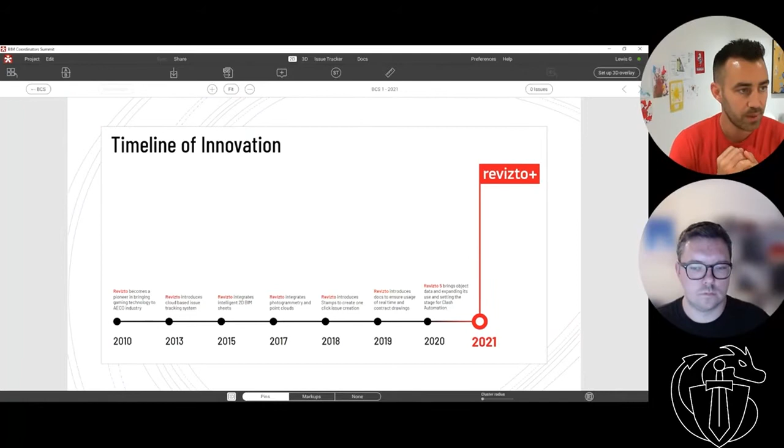So starting with bringing that gaming technology through, we moved on to a cloud-based tracking system, integrating 2D and 3D information into one single environment. Interoperability is something we're all passionate about here. It really is down to our clients what they want to use in terms of authoring tools. Revizto supports a wide array of file formats. The last 2 years, we've really been laying down the foundation to bring Revizto Plus and our Clash automation tool to the market, which is what you'll see today. If we just flick across to the next one.

And the big challenge we hear from our clients is the multiple platforms that they need to train their users on. Taking some points from the last session, we see 3D viewing platforms, 2D review platforms, a communication platform, a tracking platform, a clash detection platform that are required by project teams to do their coordination successfully. Revizto is an integrated collaboration platform that will allow you to do everything I've just mentioned in a single tool that's lightweight and user-friendly, so we can engage with the entire project team. So as an integrated collaboration platform, we can do everything I've just mentioned in one place.

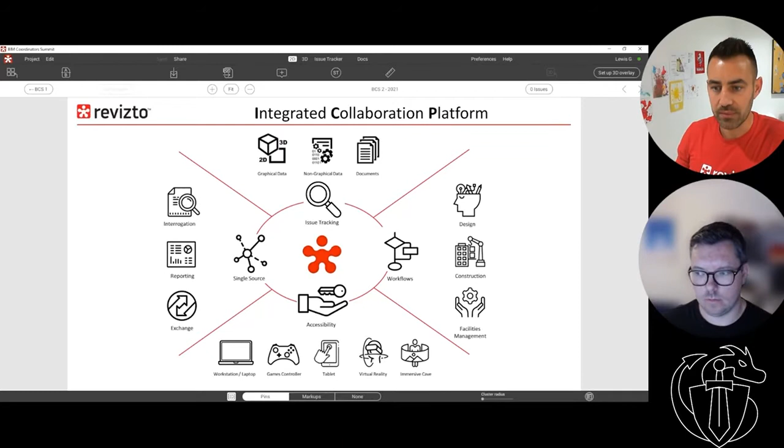So without any further ado, we don't have too much time, Lewis, so if you just flick the next slide, we can show our audience Revizto Plus. So over to you, Lewis.

Yeah, perfect. What we're about to show you has been 9 months in the making, lots of development time with our technical team and our industry partners as well, helping to shape this in a way that's really going to change the way in which coordination is carried out on projects. And again, it was mentioned in the previous session regarding training, and not every company is lucky enough to have these skilled experts working on all their projects all the time.

And what we're trying to do at Revizto is trying to make the tools as easy as possible to use. Again, using as many different of the authoring tools as possible, so there's not just one way of doing this. But making the tool just so easy to use that anybody can do this, whether or not you are a professional BIM coordinator, or you might be a design manager, or you might just be an engineer working on a project.

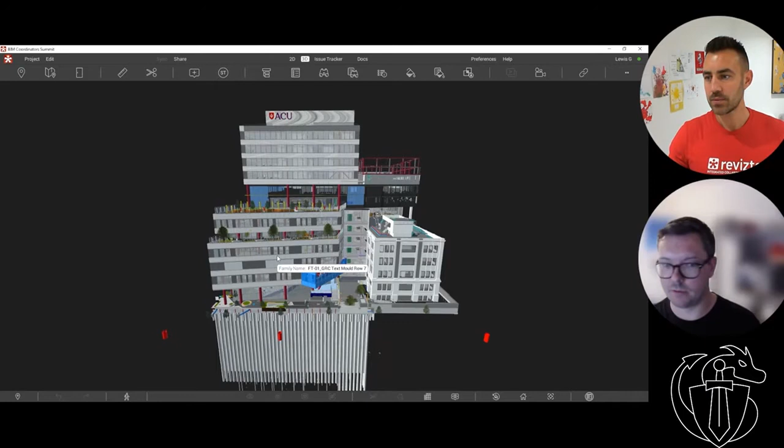Revizto Plus and the Clash Automation is all about making everyone kind of an expert if they need to be able to assist with the coordination process and saving time. So we're going to jump straight in. We're going to focus on the Clash Automation tool. Our Clash Automation tool has been built entirely around the generation of search sets so that you can be as specific or as generic as you want with the data that you're clashing.

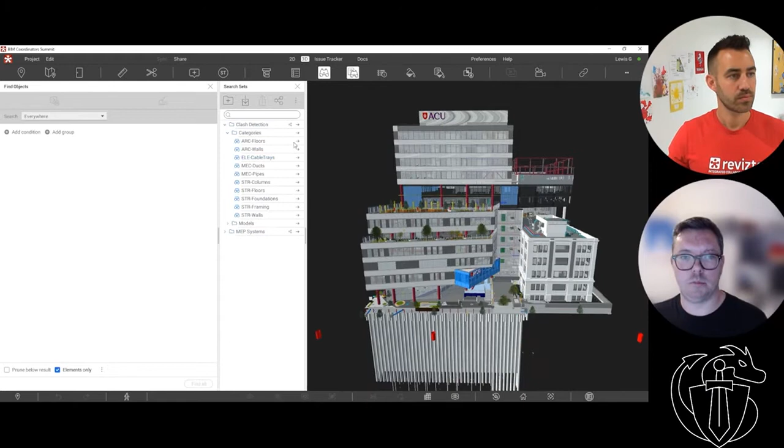So I've got some search sets set up on here for models. So we've got architectural floors, architectural walls, cable trays, ducts, whatever it is, but we've also got the whole model level. So I can clash all the architectural models with other things as well. So we'll jump into our Clash Automation tool.

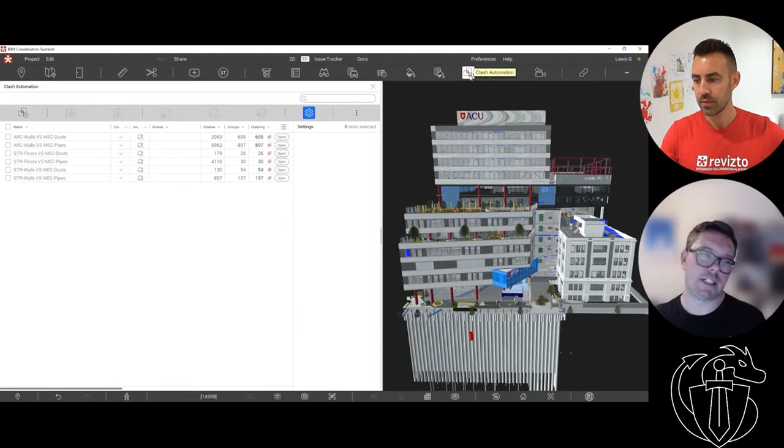And Revizto, as Rhys mentioned, is a collaboration tool, which means that multiple people can work in the space at the same time. And that's now true for our Clash Automation tool as well. So you can actually have many different people running their own clash detection all within one platform. They can be sharing those results with different people. They can be using the switchback functionality that Revizto has back to the authoring tools as well.

So immediately I can see that Rhys is now actually in there reviewing the structural floors versus mechanical pipes clash test. So it's just opened this up to have more people doing the job at the same time, but because it's so easy to do, it doesn't take any time for them to learn this or to really get to grips with carrying out Clash Automation.

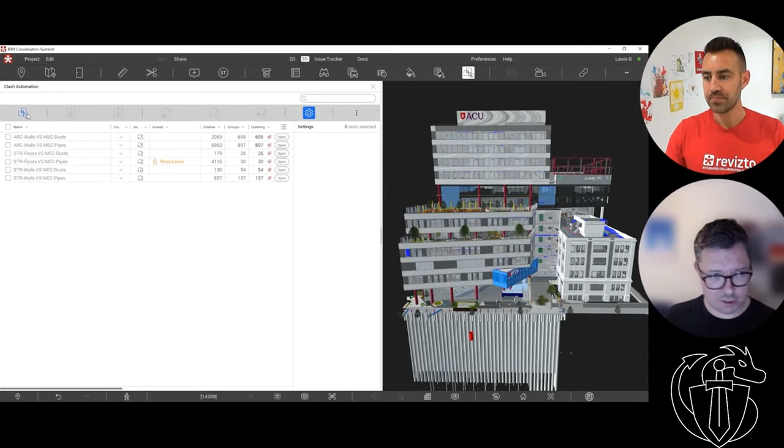So we're going to jump straight in. We're going to create some new clash tests. We mentioned it's all search set based, so I'm going to do my structural model versus my MEP model, a fairly standard clash test. I could use my categories and I could be really specific with the kind of clash test that I'm creating. But with the tools that we've generated, we can be very generic in our clash tests and really specific with the way in which we group the results and share it with the wider team.

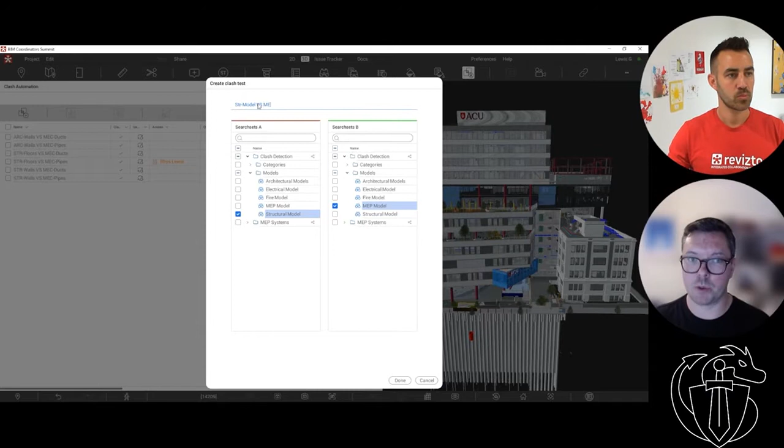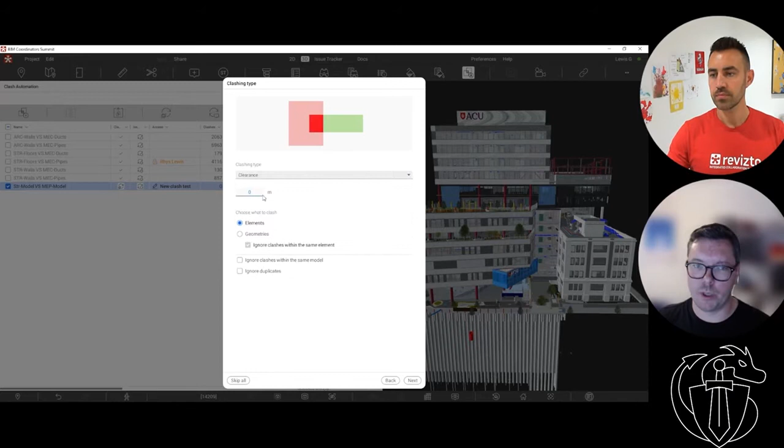So I'm just going to create this one here and I'm going to say done. I can import settings from previous clash tests. Again, because it is collaborative, you can share and pull information in from previous ones, but I'm going to carry on without. Now I'm going to specify my type of clash. So we've got a standard hard clash. We've got a clearance, so we can automatically add zones around objects to ensure that there's maintenance room or just allowing for space between them.

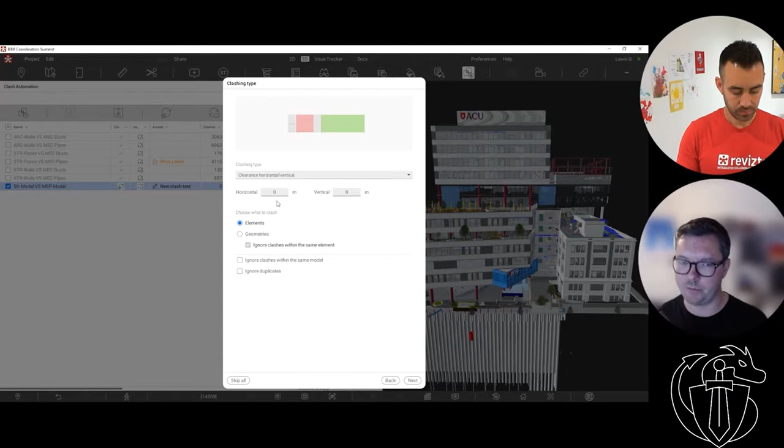And with the clearance option, we also realized that it's really important to have a separate horizontal and vertical offset, because sometimes you only care about the vertical offset, not the horizontal one. And by having a single clearance space, it was messing up your results and you would get some false positives that were only there because of the tolerance or the clearance that you'd specified. So this has been really useful to a lot of our customers, to be able to specify this separately for the distance. And again, we have the same with tolerances, horizontal and vertical.

I'm going to use just a hard clash for this one. We can choose elements or geometries depending on what kind of authoring tool you're using, but I'm going to skip through this one. The key thing with Revizto Clash is really about how we group our results. So with Revizto Automation, we're grouping everything as we run the clash test. We're not having to run the clash test, get our results and then manually group them or use grouping tools to do this. It's going to be immediate with the running of the clash test. And in here, we've got 10 different types of grouping that we can do.

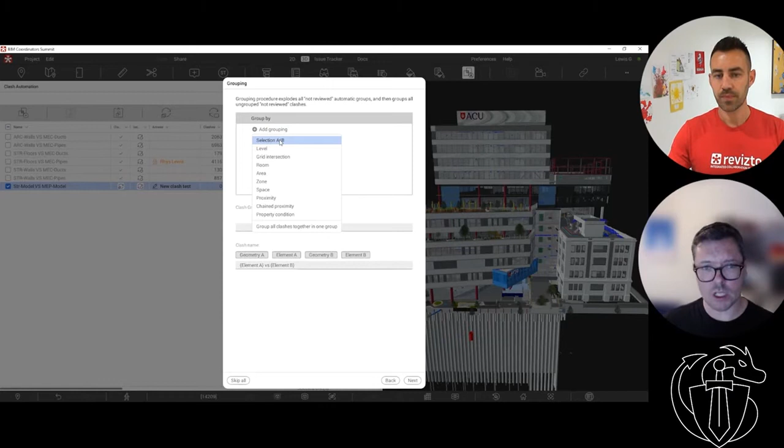So we've got selection AB, which basically means that you can choose the left object or the right object to group your results by. You can group by level, you can group by grid intersection. Grid intersection has proved massively popular with our infrastructure projects where they're using chainage lines as grid references and they're able to group their results immediately through that method.

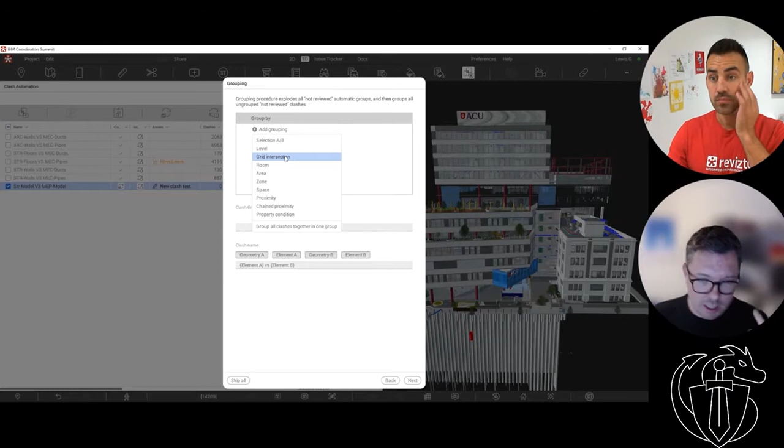For projects where we have room data, we can group immediately by what room the clash is in. So you can see straight away the problem areas in the project and things like that. That's also true for areas and spaces, which are more Revit-specific terminologies, but everything else here works with all the other platforms.

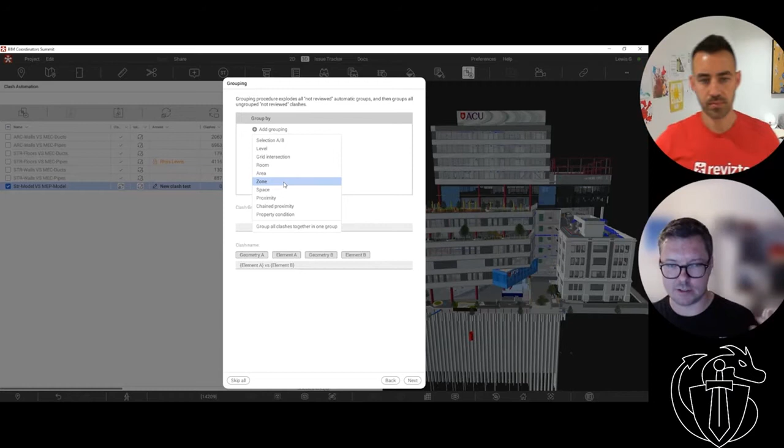We have zones, and zones are like custom created spaces within Revizto. So the way in which this will work is in your authoring tool, you will create an extrusion or many extrusions that you want to zone the project out by. So for example, you might have 4 or 5 buildings in the same Revizto project. You could easily create an extrusion around each building, call it building 1, building 2, building 3, etc.

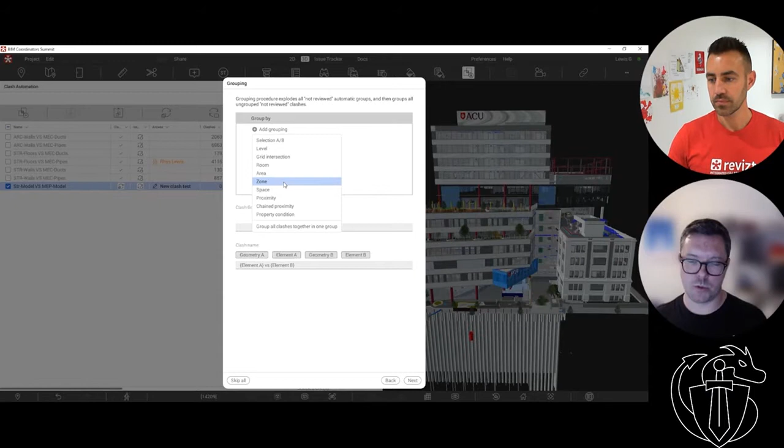Export that into Revizto, convert it into a zone, and then you can group by what building it's in or whatever it is that your zones are going to be used by. So again, it's just really helpful for people. You might not have rooms available, but you can create zones that help you break the spaces down as and when they're needed.

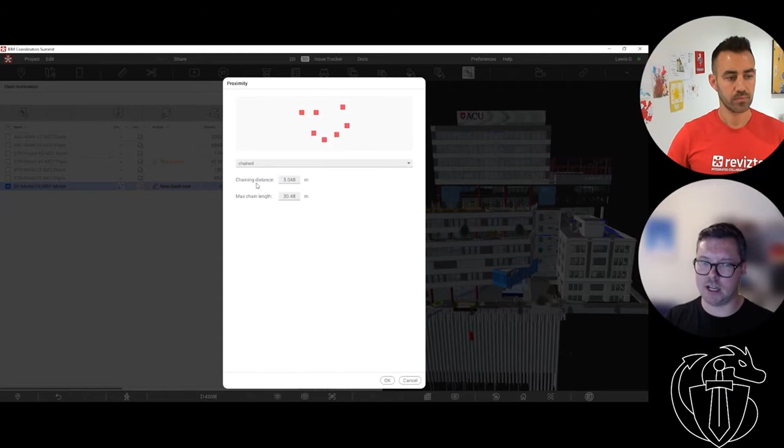We've got proximity and chain proximity. So proximity allows you to draw spheres around the clash, and then it will group everything together by there, so you can create nice, neat little chunks. And chain proximity does the same, but it starts joining the spheres together. And you can specify a maximum length of the chain, so it's not going to go on forever. It will be sensible about how it works.

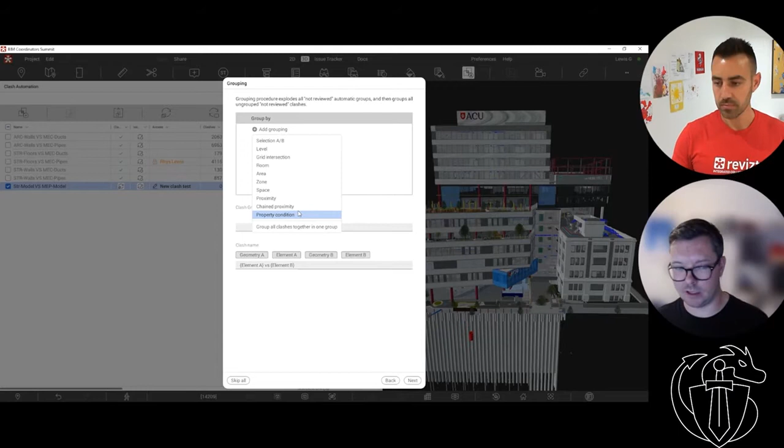And then finally, we've got a property condition, which basically now lets you use any of the data in the model to start grouping your results by. So it doesn't matter what it is that you're looking for, you can find it, you can add it, and you can group by that method. So for this example, I'm going to start off just by grouping by my system abbreviation. So I'm going to come in here and choose system abbreviation, and I'm going to say, OK, that's all I'm going to do for the time being.

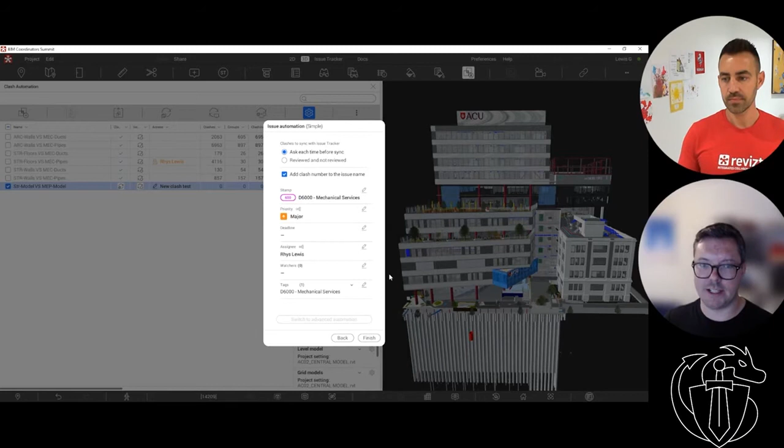We then say next, and then we've got some automation, because as Revizto is an issue tracker, we can automatically push our results into our issue tracker, and we can follow part of our stamp. So I can specify that it's going to go to the mechanical services stamp. It's going to set the priority as major. We can automatically set a deadline here to be plus 14 days. It's going to assign it to Rhys automatically. And just so that I can find it easier, I'm going to add an additional tag to these results as well. And we can say finish.

For now, this is the automation that we've got. In the next few months, we will be adding our advanced automation here, which will allow you to use rules to define where the results go. So the simple automation that we have here applies to all the results. But with the advanced automation, you'll be able to specify rules such as if the pipe diameter is less than 100 mil, we can automatically approve it.

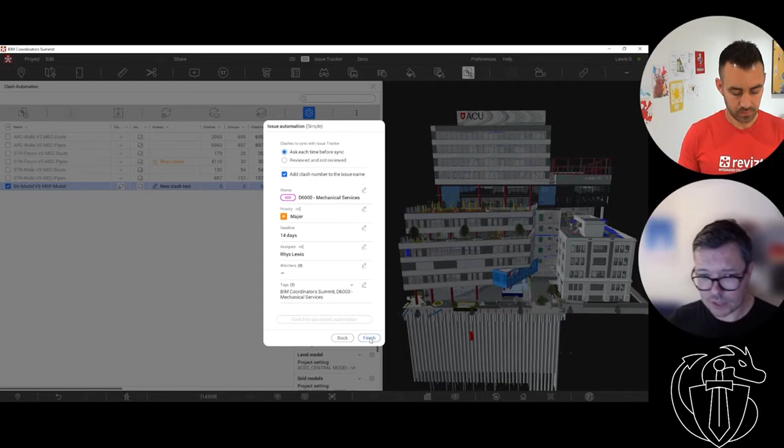If the clashes involve ductwork, we can assign that to the ductwork engineer. If it involves pipes, we can assign it to the piping engineer. You'll be able to specify that within the advanced automation so that you don't have to do it yourself. It will automatically know where to send the results. So we can click finish. Before we run this clash test, there's just a few more settings that we can run through here.

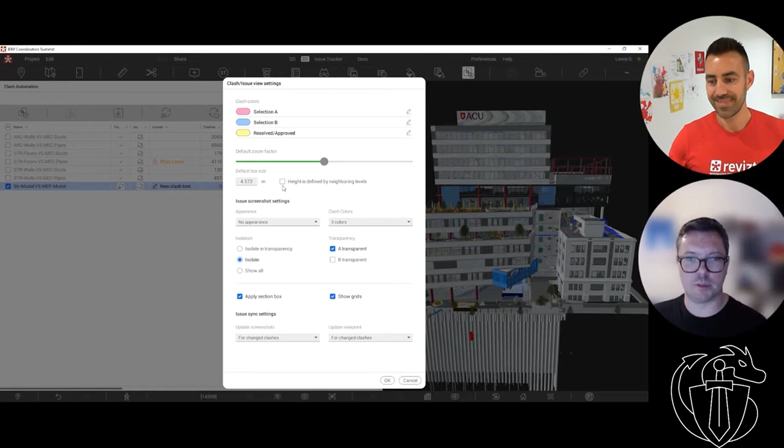So the view and screenshot settings, this allows us to change the colors of the clashes. I think years of being a BIM coordinator means that I'm actually scared of the red and green clashes, so I like to use much softer colors like pink and blue. It makes me feel a lot more comfortable. We can set up how the section box is going to work, how close to the clash we are when we're reviewing it. We can set all that kind of stuff up here.

We've got access rights for clash detection. Because clash detection is now collaborative, everybody inside of Revizto would be able to see this, which is a good thing because you then have that transparency. But what you can do is you can limit who can see it, you can limit who can edit it. So you might have it so that everyone on the project can actually view the results, but only certain people have that permission to make changes to the grouping or to even rerun the clash test as it is. So you can control that within here.

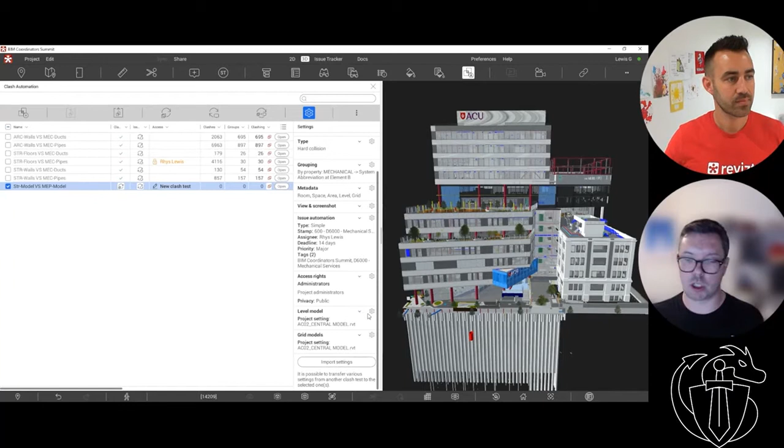And another really useful feature that we have is you can actually specify a different model to the rest of the project to use to determine what level you're grouping your results by, or by what level you're reviewing the results by. So, for example, my project is set up to use the architectural model for the levels everywhere else, but my clash test is now structural versus MEP. So what I could do, I could actually choose to use the structural model here, so I get SSLs on top of steels rather than the finished floor levels as per the architectural model. So it's giving you lots of flexibility on how this works.

I'm going to run the clash test now. It won't take very long. It's pretty quick. We've had one example with one project when we were testing this out where we generated 3 million results in 45 minutes. There was a bit of backlash on Twitter for us talking about that. People weren't really that bothered, but the idea was that we could actually run clash detection on that big of a result set in 45 minutes, and then immediately you can get in and start filtering your results out by what room it's in or by what level it's on.

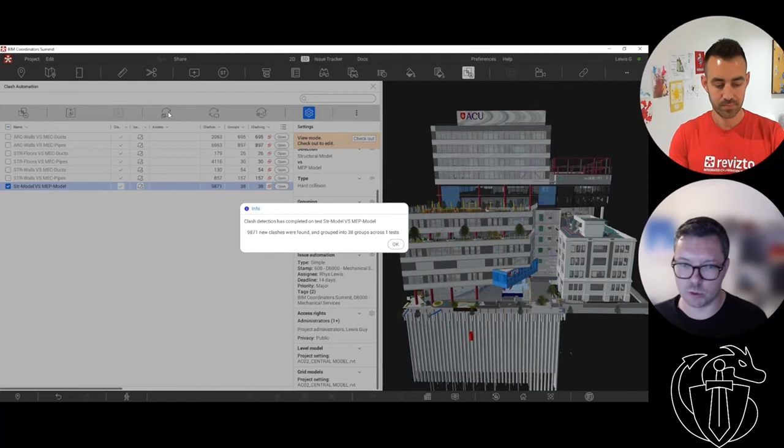So the 3 million results in 45 minutes, first of all, that is pretty quick for any tool that's running clash detection. But the fact is that within 45 minutes, you've got those results, and then you can start doing whatever you want with that information. You can start filtering it, or you can start raising issues immediately. So the job of a coordinator is not just sitting around waiting for these tools to finish running. You've now got immediate access to do it.

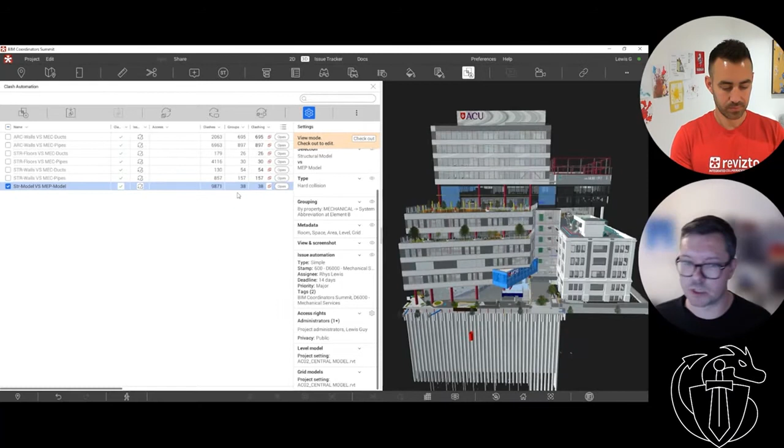So we could see there in a matter of seconds, we've generated 9,871 clashes, and they've automatically been put into 38 groups. So we're showing that raw data because, again, too many people get excited when they see their clash detection. They've only got 38 issues to review, but in those 38 issues, there's actually 10,000 clashes. So there is a bit of work to be done. It's not just 38 results that you've got to fix. So it's good to have that raw data there so that you can see exactly what's going on.

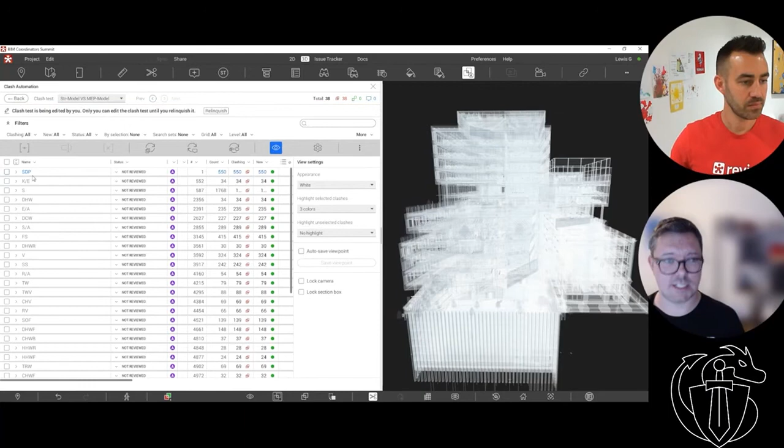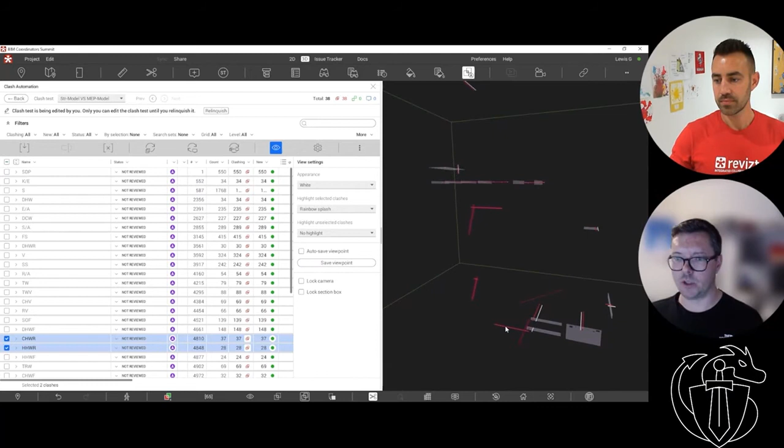We can now open up this clash test, and we can see that the grouping has automatically been done. So we've got all of our different systems. So I can come down here and I can pick my chilled water system. I can isolate that out, and I can immediately now see all my clashes that are to do with chilled water. I can show hot water at the same time, but it's not easy to differentiate between them. So we can switch our color system so that we can highlight. So the red clashes are one system, and the purple color is a different system. So you're really able to have multiple things on the screen at the same time, but review them instantly in a way that makes sense for you.

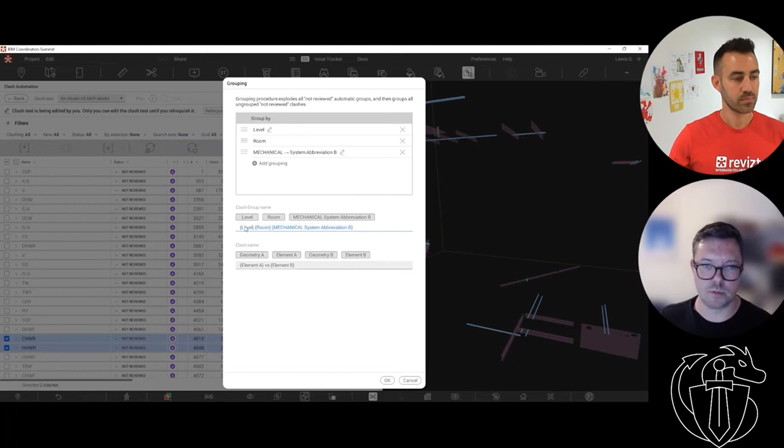I might determine that this grouping that I've done actually isn't very useful. It's a bit too basic at the moment. So I can go back into my grouping tool and I can add some more. So we're going to group by level, and we're going to group by room. So I'm just going to reorganize that. We can change the name of the group. So I can give this a name that makes it read nicely. So we're just going to say that. I'm going to say OK, and then I can just regroup my results.

And again, in a matter of seconds, this has now been regrouped. So you can do this on the fly in coordination meetings. You don't have to go away and do this at a separate time. You can start playing around with this whilst you've got the team in the meeting, so that you get grouping results in a way that makes sense to the rest of the team.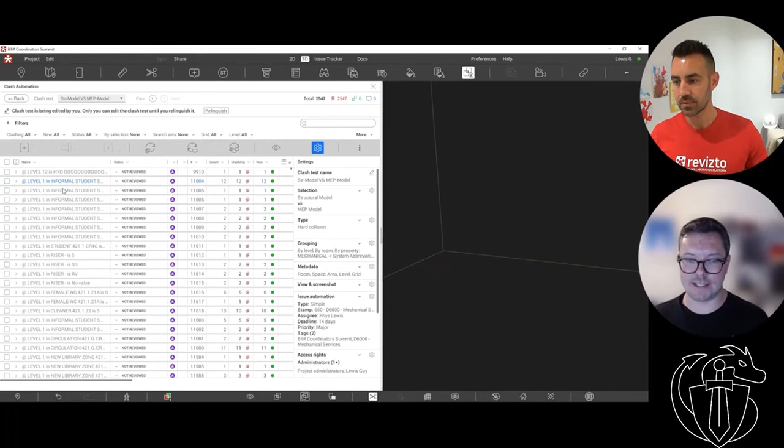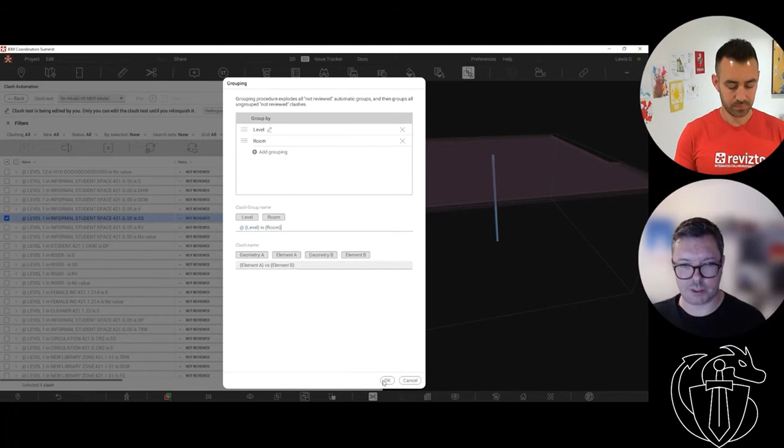So now, if I just expand that out, we can now see all of our level 1 informal student spaces and the systems that are clashing within there. So the grouping tool allows you a huge amount of flexibility to see the results in a way that makes sense. I'm going to change my grouping one more time, get rid of the system classification, and regroup that. So we've now got our groups working in a way that makes sense for us and for the team.

And now you have your coordination meeting, and you're in a room with a particular set of people, and you want to review those results. You've got a big long list here. There's still 1,000 groups to review, so there's still quite a lot of information to work through. So what we've done is brought in filters to our clash tests, so we can start to see just the ones that we're interested in.

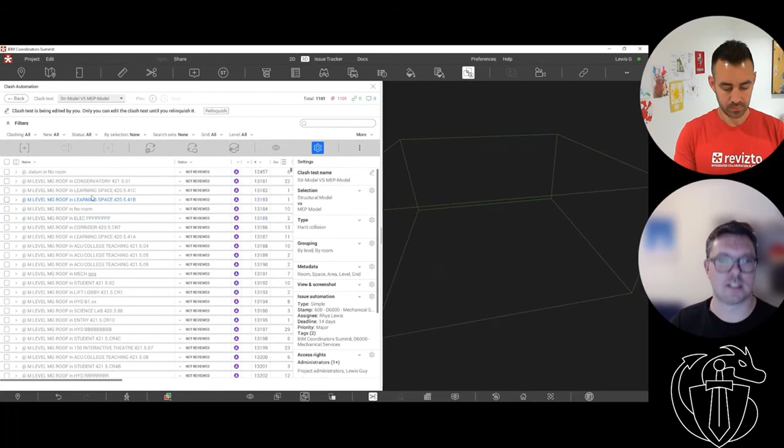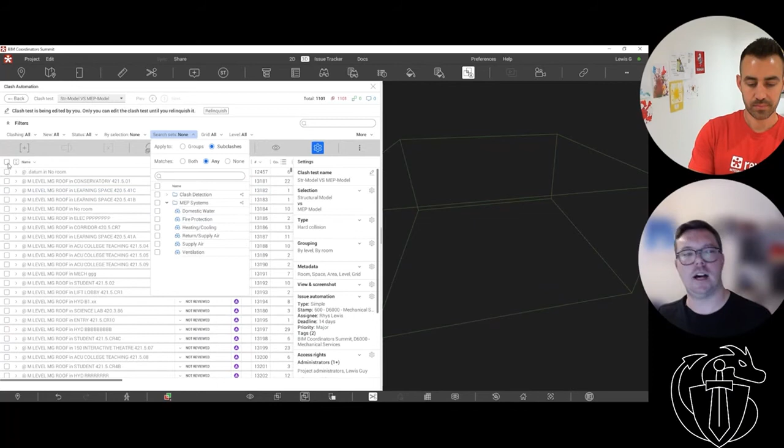So this clash test was created using the structural model search set versus the MEP model search set. But I can now go into my other search sets. I've got some search sets set up here for my MEP systems. Let's say I'm in a meeting with my sprinkler team, and I want to review all the issues to do with fire protection. I can select everything first, so we can see it all on the screen, then filter by my search set and say, just show me fire protection.

And immediately that's now filtered out every result in the clash results to just show me things to do with sprinklers. So every issue here, if I hover over this pipe, we'll see that's a wet fire protection pipe. So we can easily get the results into a way that works for the team having the meeting. And we can take this further.

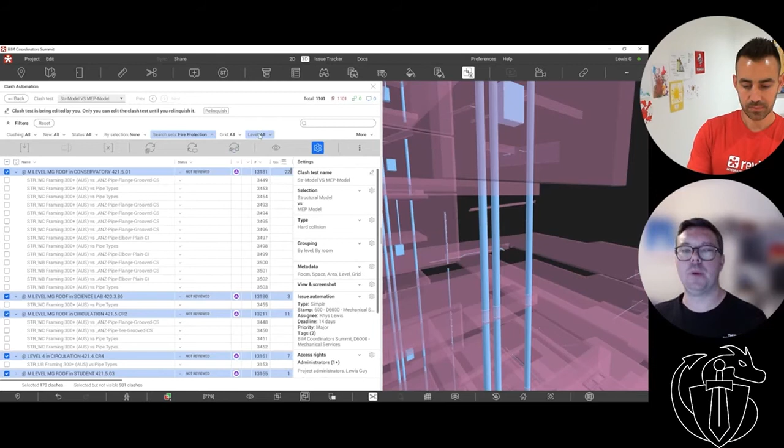So again, I can stick with fire protection, but we might say, OK, today we're reviewing level 6 only. So I can filter down to level 6. And immediately, we're now just viewing all the clashes to do with fire protection that exist at level 6 of the model. So you don't have to go through a huge long list reviewing everything, trying to work out which ones are actually relevant to the team in the meeting. You can do that immediately using these different filter systems.

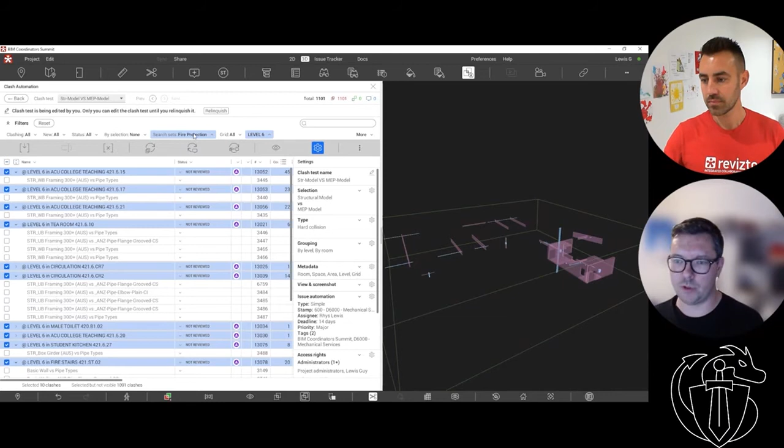At this point, what I can now do is take these clashes. There's not too many of them, so I'm just going to select all of them and mark these as reviewed. And I can now push these to the issue tracker. So we can say these need to go public, and these are going to go into the wider team, into the issue tracker. So we can just sync that.

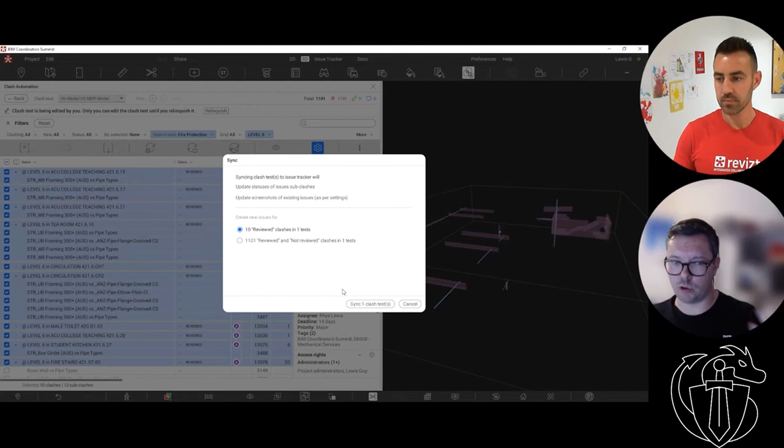It's going to ask me, am I syncing just the 10 that I reviewed, or the 1,100 that have been created? I'll stick with just the 10. So I can sync that, and that's now going to go into my issue tracker. They're going to be made public to everyone on the project, and there's now a deadline to get these issues fixed. In the meantime, I can go back into my results, and we can start playing around with this information again.

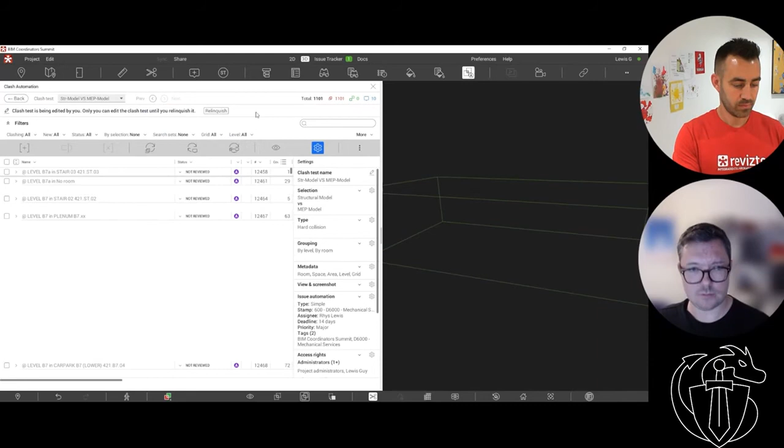So I can go in here and get rid of my level information, get rid of my search set, and go into my object tree now. So I can just say, OK, I want to see all the issues to do with columns. I can type in columns into the model, go by selection, and activate it. And then automatically, on the screen now, we're seeing all the issues to do with columns only.

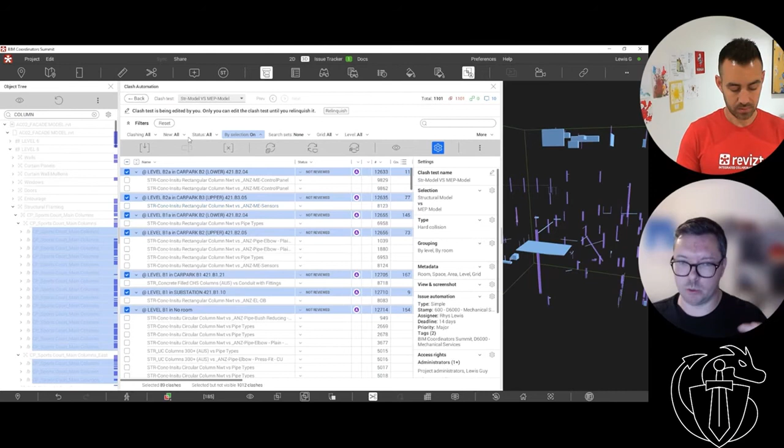So there's a huge amount of flexibility to allow you to see what you're interested in without having to look through everything else, just trying to work out where those issues are. So there's lots of options with the filtering that allows you to see the results that you want. And also we mentioned rooms—I can filter by room. So I can come in here and say, OK, today we're reviewing the informal student space. I can come down here and select all of those issues.

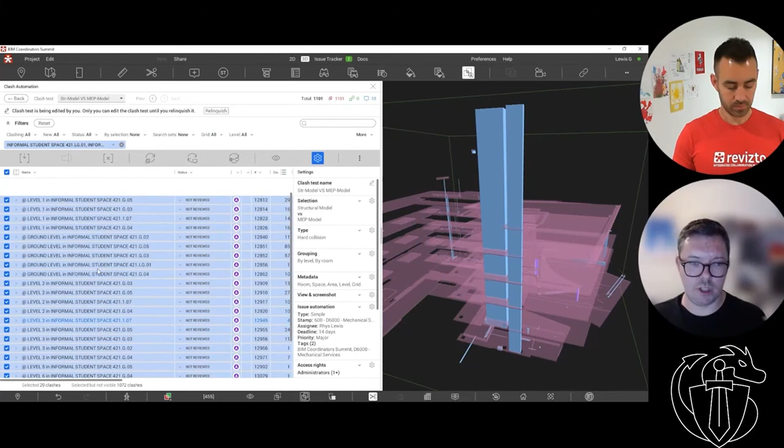All the clashes I'm looking at are to do with the informal student space. I might want to review these and sync that with my issue tracker. That's now gone through and made issues out of all of this information. Once we've made those issues, they exist in the issue tracker, which everybody on the project has access to.

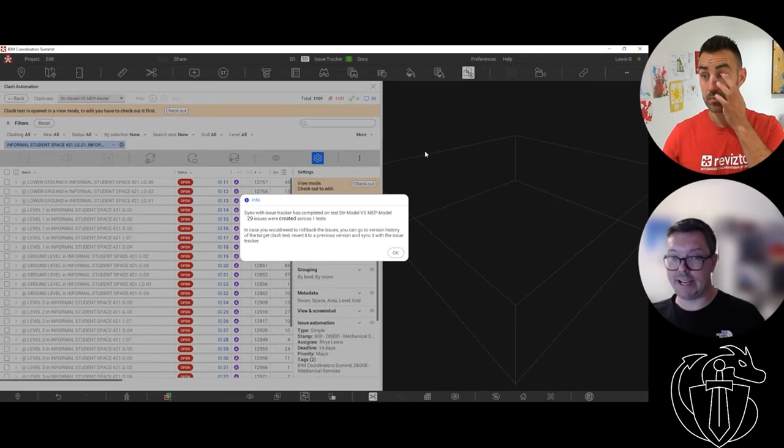I'm going to jump up into my issue tracker here. We can see all of these results. This is everything, and we can see how many issues are in each group. So I can view this one. I've got just a snapshot of the image here, so it's just a dumb kind of image.

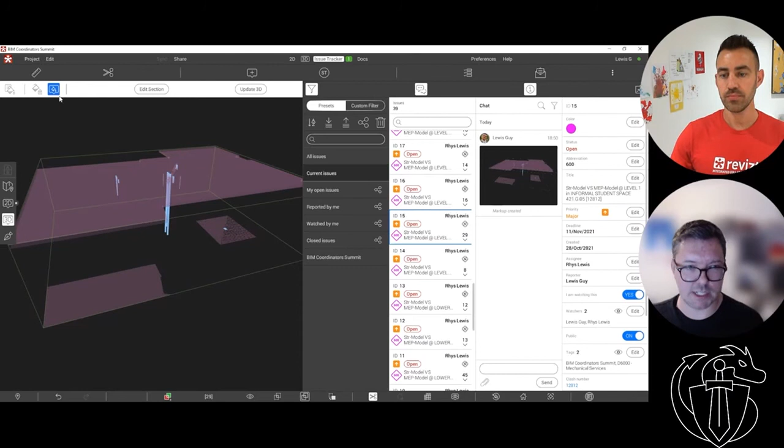I can switch to my 3D space and start to see that in 3D. We can review it, take measurements, and adjust the section box. Everything we do in Revizto is connected in the 2D and 3D environment, so I can switch to my 2D drawing and see where these clashes are. We can see that all the clashes in this particular area are focused around this one room because they're grouped by room, so that makes sense. I can actually see these now on a drawing exactly where they are.

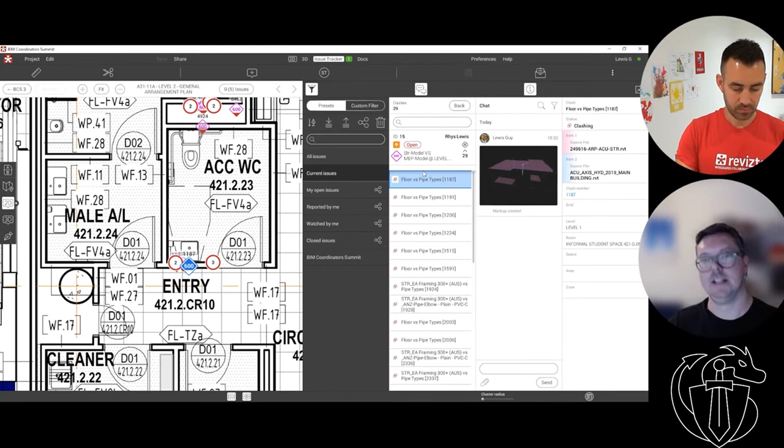We have a switch-back functionality which allows you to just double click on the issue, and you're taken straight back to that issue location in your authoring tool, so you can get in there and fix it. As Rhys is changing the status and playing around with it here, this is all live communication with the team. I'm just going to add in there, Lewis.

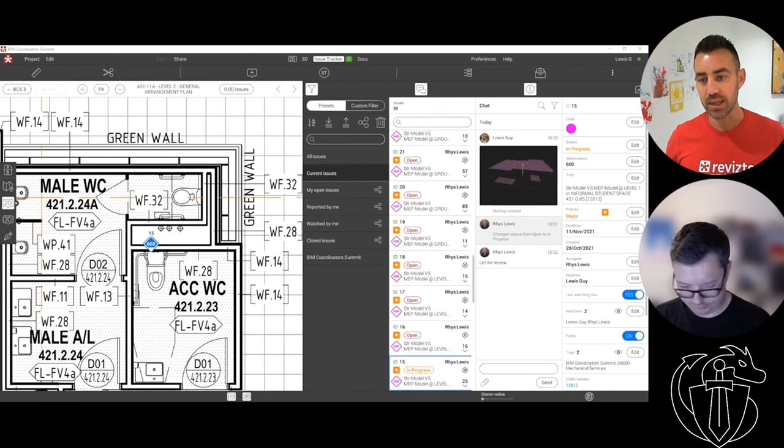Talking about that gamification element, I've got Revizto now on my iPad. I'm in sunny South Wales, Lewis is in Switzerland, and I've just been delivered those clashes with all of the relevant information in real time on my tablet. So all of this has been monitored and tracked.

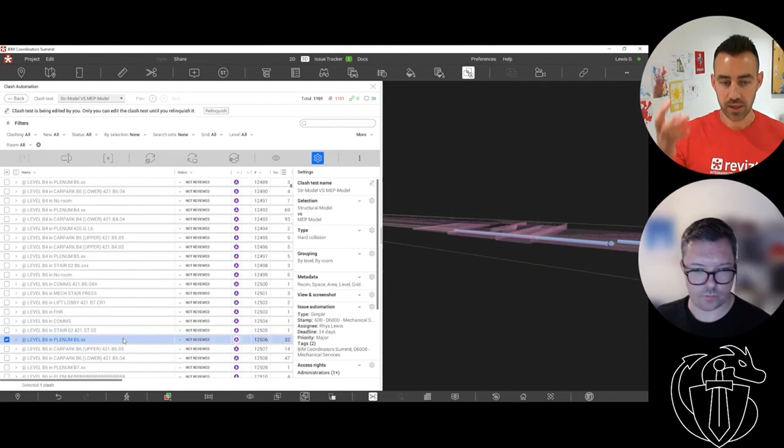They've come through a stamp, so all of the fields on the right-hand side there, including deadline and who else needs to be copied in, is all used to report and filter against. As Lewis mentioned, importantly, all of those clashes we can now review in 2D. By having a 2D review tool, a 3D review tool, a clash detection tool, and a tracking tool in one place, that allows us all to work much more efficiently and deliver more projects.

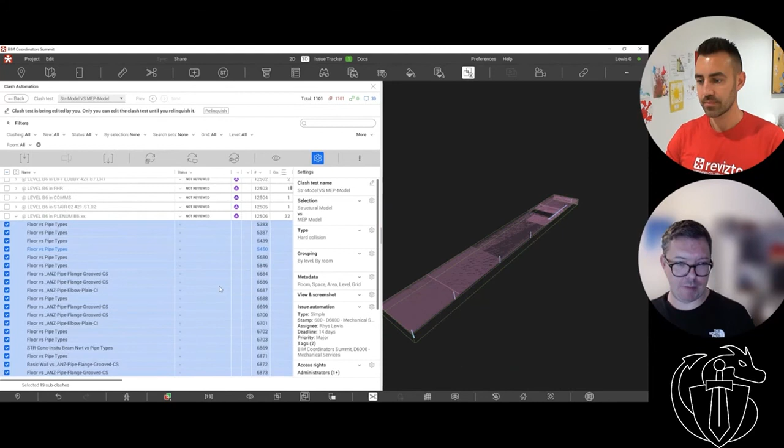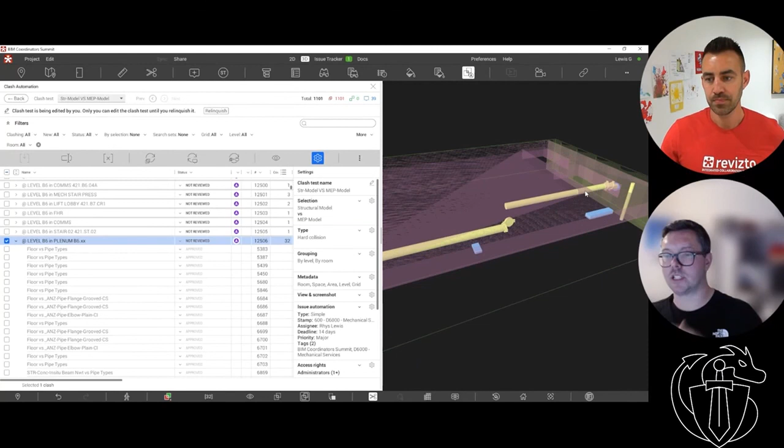Obviously I just forced this in, so these are still clashing. But if this was done on a real project, when you're updating the models and rerunning clash detection, you'll be able to see immediately in each group how many results are still clashing versus the ones that have been fixed. So visually, everything yellow on the screen has been resolved, and everything that uses the pink and blue color is still clashing. So you have this visibility over all your information immediately with whatever function you want to do. You can filter and control that instantly.